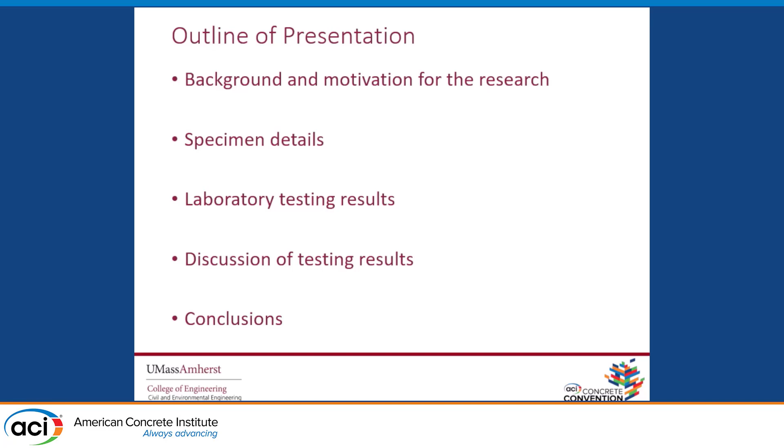In terms of background, the primary objective of the research project was to evaluate the structural integrity provisions that exist in ACI 318-19 for cast-in-place perimeter beams. The primary objective was to evaluate the placement of bottom bar splices that provide continuity for these perimeter beams, one of the fundamental aspects of detailing this type of beam. As an effect of some testing observations, we also evaluated transverse reinforcement requirements, particularly spacing, for perimeter beams designed in seismic design categories A or B, the lower seismic design categories in the United States.

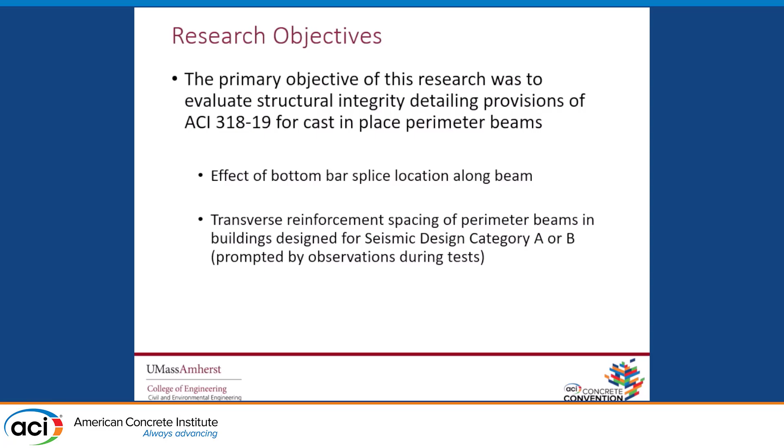This was prompted by observations after the testing; we did not expect this to take place a priori before we started testing. To frame the discussion, let me give a little background on the intent of section 9.7.7 in ACI 318. The idea of that section is to prevent disproportional collapse of large portions of the structure after a small failure, or failure of a small portion of the structure.

I quote ACI 318 R9.7.7: it is the intent of this section of the code to improve redundancy and ductility in structures so that resulting damage may be localized. The idea here is that after the unintended failure of an element due to some form of abnormal loading, this failure will not propagate to the rest of the structure and cause general collapse.

Many of you know what that means. What that implies is that the structure has the ability to redistribute internal forces after local failure, and that this capacity is maintained at large displacements, at large plastic deformation. I'd like you to keep that in mind as we go through the presentation: the ability to redistribute forces and maintain capacity at large displacements.

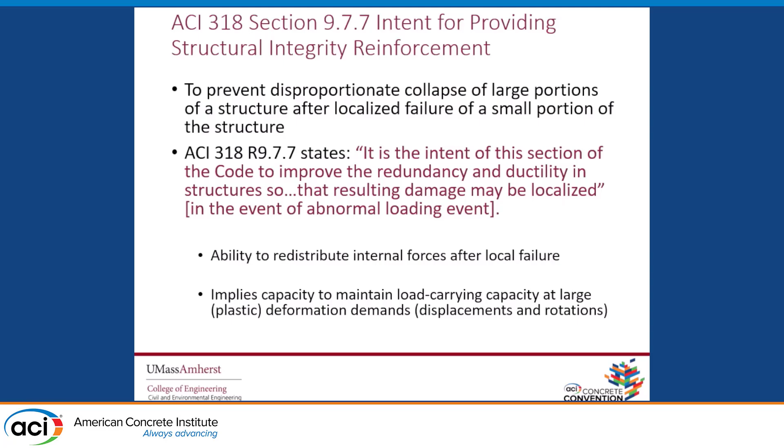Going over some details, this is borrowed from an ACI publication summarizing the typical details for integrity reinforcement in perimeter beams in ACI 318. The key aspect is that one needs to provide continuous top and bottom reinforcement, with a certain fraction extending into the supports. One quarter of the reinforcement provided in the maximum positive region needs to extend into the supports, and one sixth of the negative reinforcement at the support needs to be continuous through the length of the beam. Continuity may be achieved by splicing longitudinal bars with Class B splices, so they don't need to be one piece of reinforcement.

The other aspect of integrity reinforcement is that these longitudinal bars intended for integrity need to be enclosed by either closed stirrups, U stirrups with a cap tie, or hoops throughout the length of the beam. The spacing of these is not indicated in ACI, but it's presumed the spacing would result from other demands on those elements such as shear and torsion.

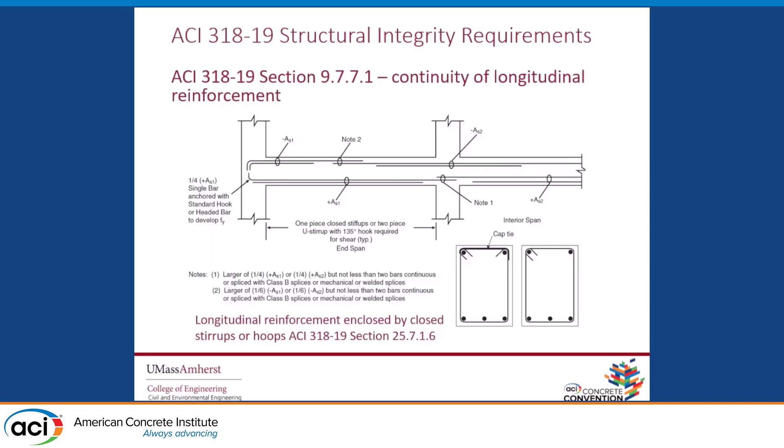With that in mind, we looked back at some testing other researchers have conducted on structures in higher seismic design categories. Our intent was to evaluate how these provisions worked for buildings designed in the lower design categories in this country. So we chose this floor plan, which has been studied by others, essentially from NIST, Liu et al.

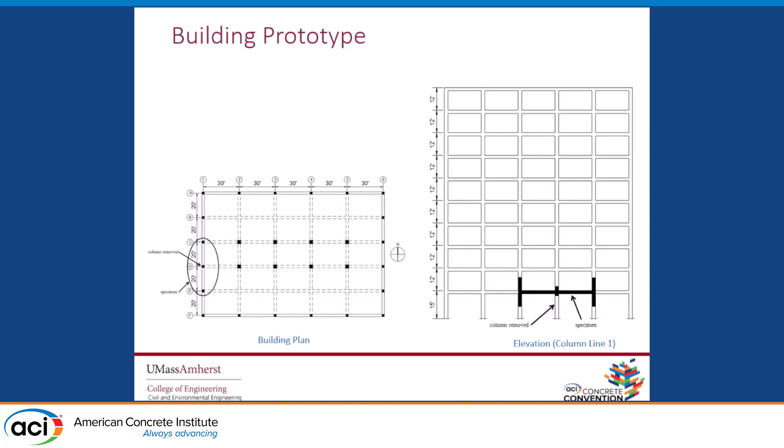The building was a fairly regular rectangular building in which the perimeter frames are the ones we intended to study. We modeled part of that perimeter frame, thinking of the potential loss of an intermediate support, and constructed this H-shaped specimen at full scale in the laboratory to test it to failure. So we were using a building prototype to design our laboratory specimens.

What we were intending to study was the location of this bottom splice in the bottom longitudinal reinforcement, which would provide the catenary action needed to prevent disproportional collapse. Some of these details rely on catenary action to prevent disproportional collapse from occurring.

The details of the columns are not important, but what's really important is where we placed the lap splice and the arrangement of these closed stirrups along the specimens. As you can see, we tested 3 specimens.

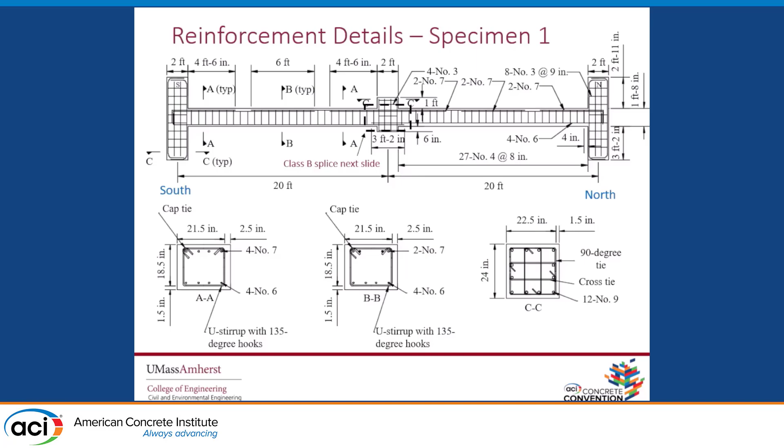As you can see, we tested 3 specimens. The dimensions I should highlight were full scale, so we had 40-foot long specimens. The only thing we changed in these specimens is where these bottom bar splices were located: centered about the center column, and some two distances away from the center.

The idea was to minimize the congestion in the joint region and see if moving the splice out of the column region would affect the response of the specimens.

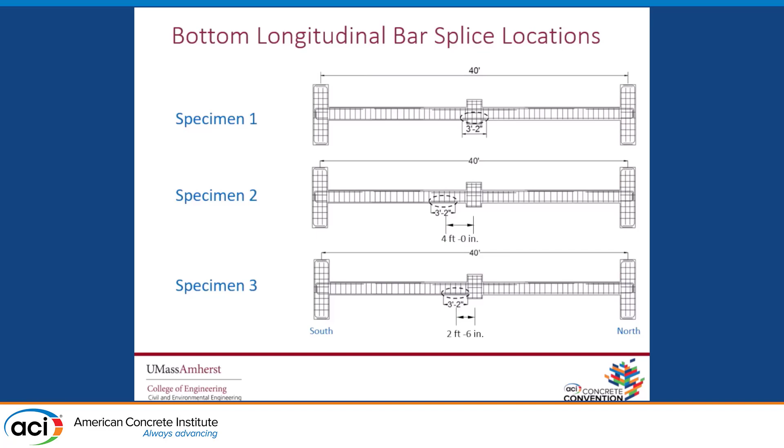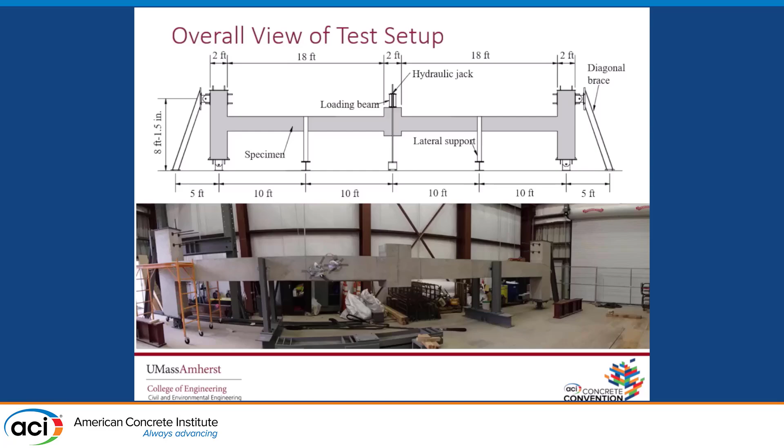We were loading here at increments of load to come up with the maximum load this specimen could take, and try to develop that catenary action we were looking for to prevent disproportionate collapse.

Some of the instrumentation I will be referring to: the specimens were instrumented with displacement transducers along the length of the span. We also had inclinometers located at the ends of the beams to measure rotations and come up with moment rotation relationships. We also had load cells located under the application of the vertical load.

We also wanted to measure how much restraint was being provided at the top and bottom of the column, so we placed some load cells also at the ends.

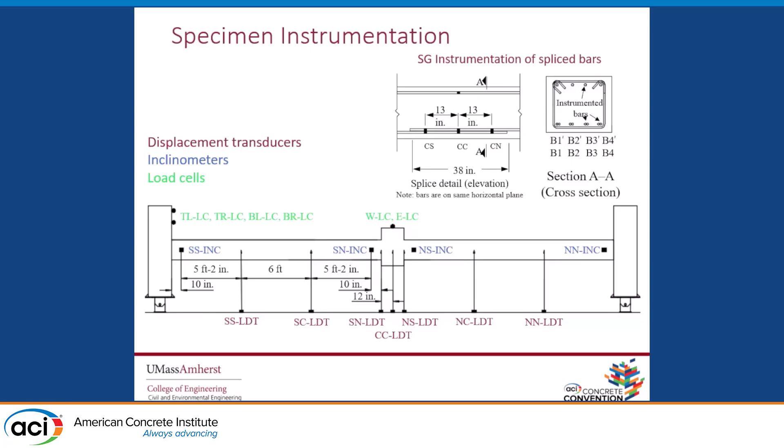One item I will not discuss in this presentation is that we also instrumented longitudinal bars with strain gauges at the location shown here, to address whether the location of the lap splice was going to be influential in the specimen response.

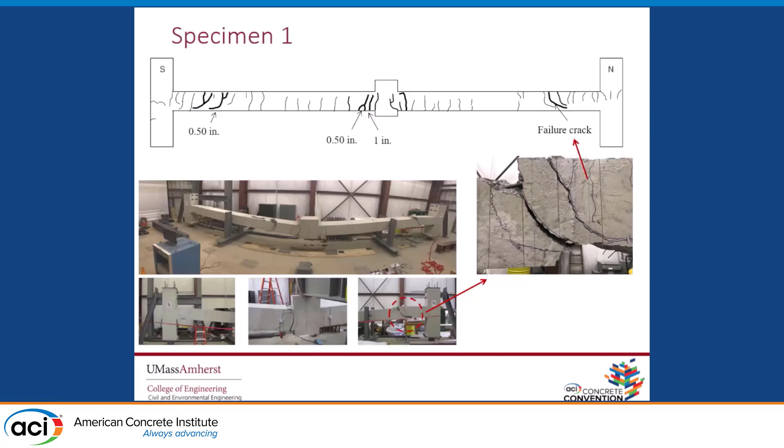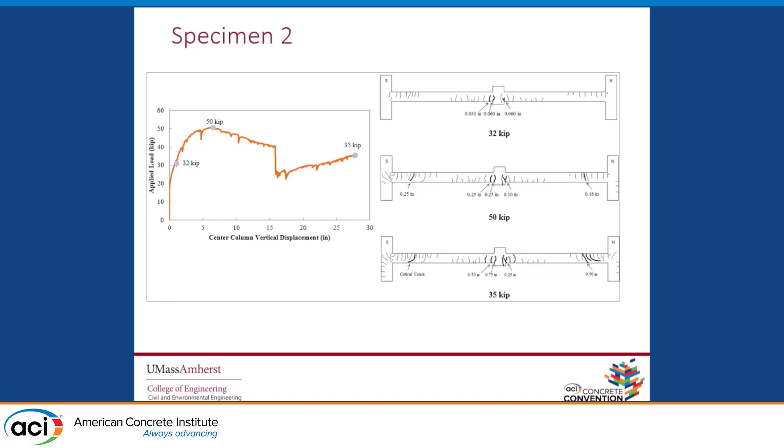Specimen 2 had a similar behavior, loading to peak and then sudden unloading. In this specimen, we kept loading to try to develop, as I will call later, catenary behavior of the specimens. You see similar crack patterns as for specimen 1.

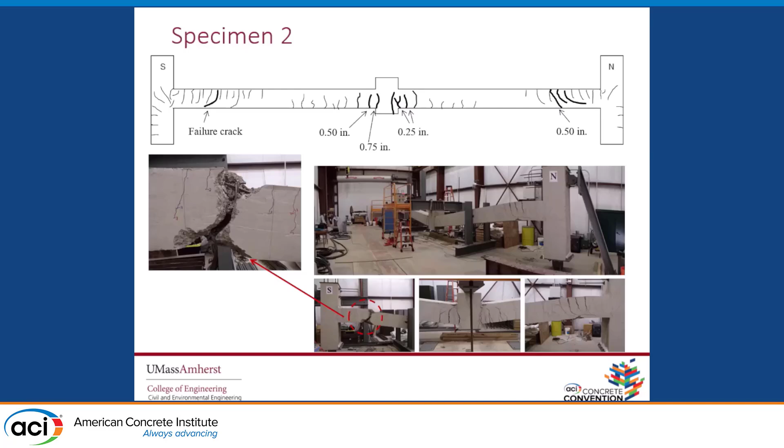You can see an overall view of how much deflection was imposed on the specimen. The critical crack in this case formed in the south face, and this gives you an idea of the width of that critical crack. In this case in particular, we were fracturing stirrups as well.

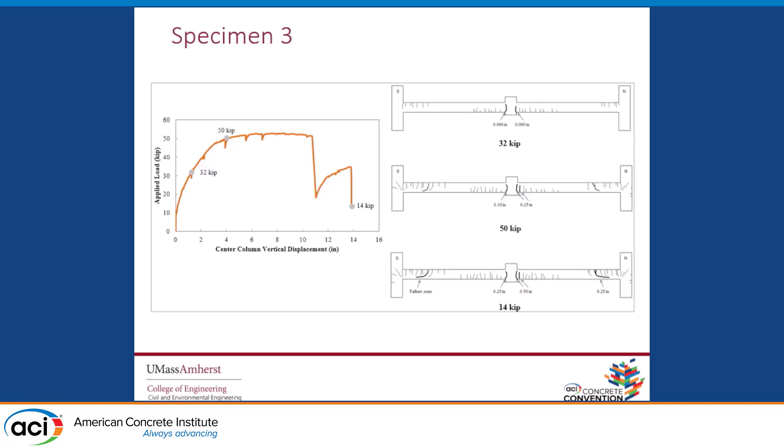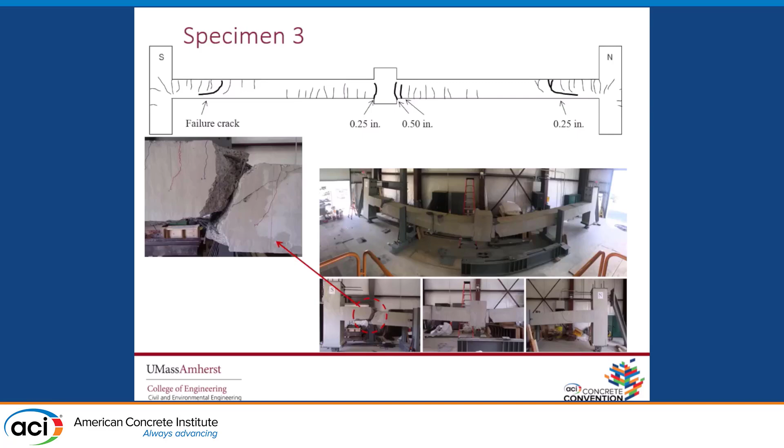Notice this big crack. This is not after moving the specimen, this is right after testing. It's a huge crack that forms, that starts diagonally and then suddenly widens as the stirrups fracture.

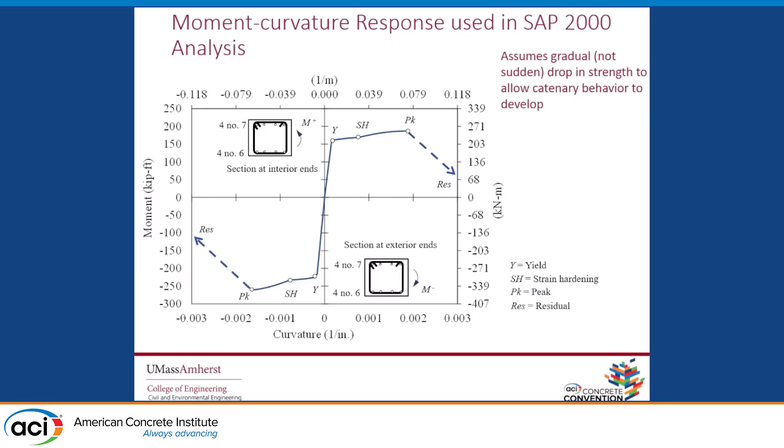So this model does not include any fracture or loss of shear transfer, in order for us to be able to get, going back to this plot, this curve that increases with increased deformation.

Going to what other people had tested, I mentioned the study by Lew et al. Their specimen looked very similar to the one we tested. The key difference was that these specimens were detailed for intermediate moment or special moment frames, so these would be for seismic design categories C through F.

The key difference is the amount of longitudinal reinforcement at the ends, but also the spacing of transverse reinforcement at the ends of the beams. As you can see from the plots, they measured load deflection responses that were very different from the ones we saw in our testing.

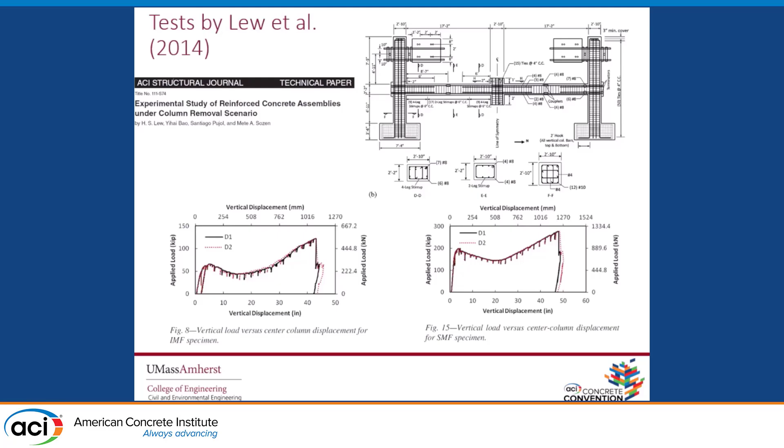In their tests, they were able to develop peak force, then some unloading as the force transfer changes from beam behavior to catenary behavior, and then catenary behavior at larger displacement. They found the same type of behavior for the two specimens tested in this program.

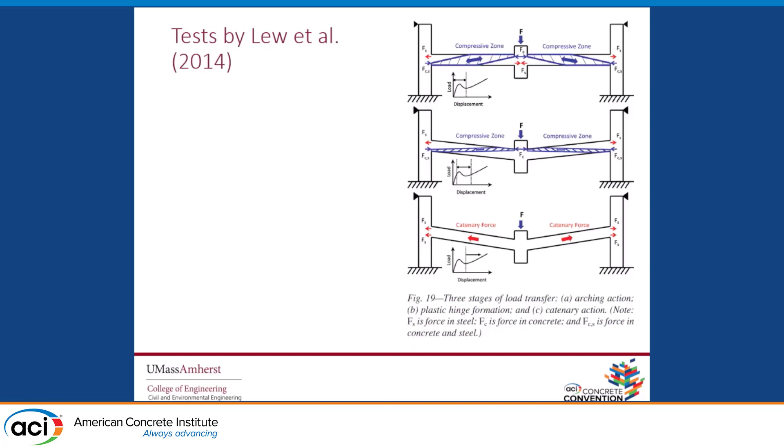The load transfer characteristics were categorized in three stages. What some other people have called beam behavior, they said is more the first stage of loading, beyond peak and first unloading. There's an arch that forms between the application of force and the supporting columns. As you keep increasing deformation, this compressive zone narrows until you're able to develop catenary force that allows the specimens to pick up force by catenary action, by cable action.

Other people have studied this problem as well, and they have proposed simplified models to try to capture the response of specimens like this. In tests by Jian and Zheng, they also identified a beam stage, a transient stage, and a catenary stage, and they tried to define each of these stages through a series of multiple lines, depending on displacement.

They proposed a series of equations to capture the response, and then they superposed their model to try to replicate the response measured by Lew et al. What's interesting is that these curves lie right on top of, or very close to, the curves from the measured test from Lew et al.

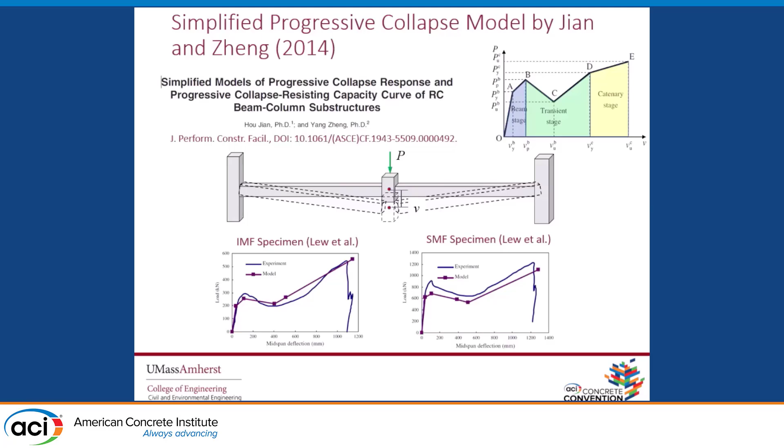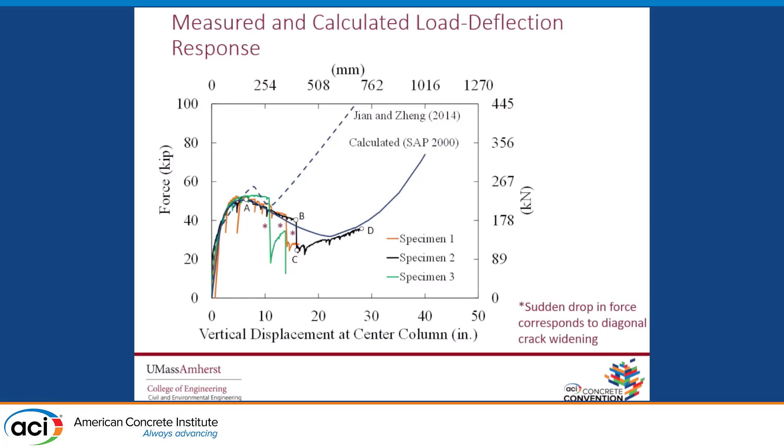But this is the model that we also used, shown as dashed in the load deflection response I showed earlier, right here. You can see their model was not able to predict the response of the specimens we tested in this program. Our specimens were deflecting much more, and more importantly, we're not able to pick up the force associated with catenary behavior.

So this is where what I mentioned earlier comes in — the characteristic of our specimens was quite different from those tested previously, primarily in that there was a sudden crack widening at some level of displacement, and more importantly, as the crack widened, eventually there were stirrups that fractured. So we thought about what was the cause of first this sudden drop in shear force, and that would then translate or lead into fracture of stirrups.

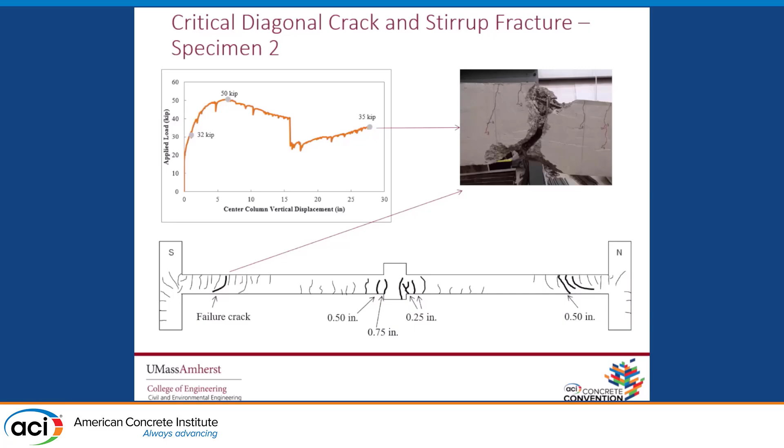We wanted to investigate what generated this sudden loss in shear force. For that, we had to incorporate the two. We evaluated using the ACI equations for shear strength, where nominal strength is given as a summation of the concrete and shear stirrup contribution to shear strength.

We looked at the two code equations from ACI, but we also looked at models proposed in the past that incorporate the effect of plastic rotation in reduction of this VC term. So two models that we studied — the important aspect here is this gamma term, indicating that the concrete contribution to shear strength decreases with increased rotational demand. Using these two models, we were trying to understand why our specimens failed the way they did.

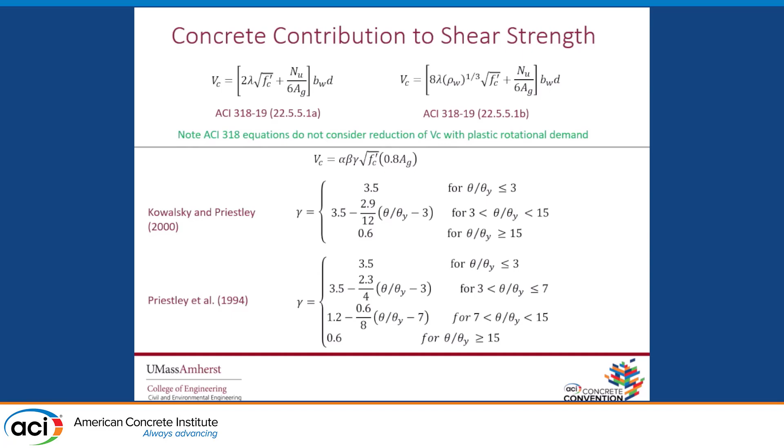Our specimens were able to reach that shear force associated with plastic hinging, but at some point, at increased rotational demands, we saw a drop in shear force. That could be explained using those models that incorporate reduction in shear strength with rotational demand. We were able to identify a range of rotational demand values for which we would expect the V sub C term to drop suddenly, which might explain the behavior of our specimens.

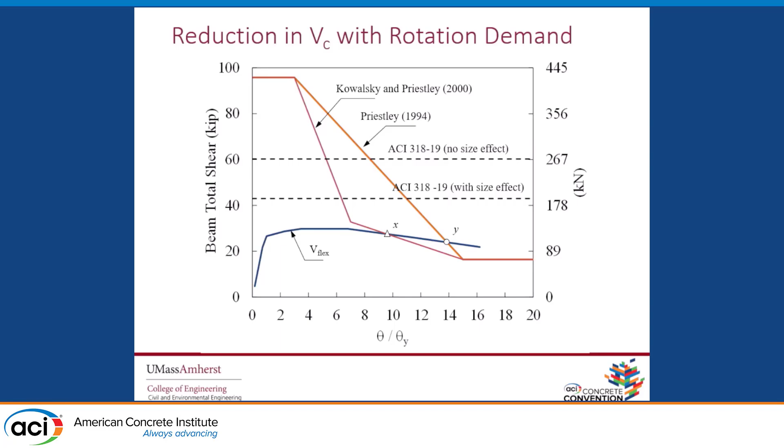This leads to explaining why we had this sudden drop in shear strength at higher rotational demands. Now, this doesn't happen in specimens or elements detailed according to high seismic design categories because of the closer spacing of stirrups that prevent widening of those diagonal cracks.

So in conclusion, I didn't mention anything about longitudinal bar splice location because there was no influence in the behavior of those specimens from the three locations for that bottom longitudinal splice location.

But we did find that catenary behavior, which leads to prevention of disproportionate collapse, did not develop because the specimens did not have the capacity to carry loads beyond formation of these critical diagonal cracks, and therefore the specimens failed prematurely in shear prior to being able to develop that catenary action.

We recommended, or found, that models which include reduction in shear strength, V sub C, as a function of rotational demand can be used to explain this type of behavior.

The steep diagonal crack that formed after loss of VC really decreased the available shear strength, which then led to eventual fracture of transverse reinforcement in some cases.

So these are the main findings of this study. I think what follows is that we need to provide attention to how we detail these beams so that they don't suffer from these sudden losses in concrete contribution to shear strength as a function of rotational demand.

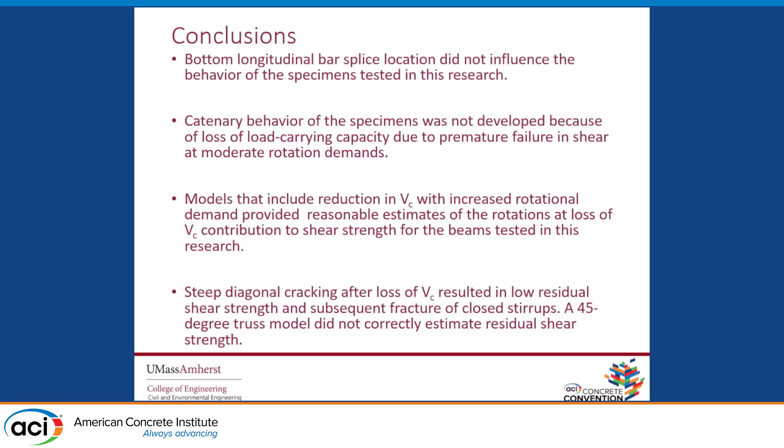I don't know how you want to moderate questions. Okay.

We have a couple minutes for questions if anybody would like to step up to the mic here, kind of difficultly placed behind the column. Yeah, yeah. I might have missed it.

So when you showed the special moment frame specimens, I saw a fixity in the columns in terms of foundation. Was that replicated in your specimen? I don't know if I saw it correctly. That's a good point—our specimens had pinned boundary conditions at the base.

Pinned, yeah. So what we were trying to model, if you remember the frame, was approximately mid-story height to mid-story height, where there's very little moment. I don't know what the motivation was for fixing the bases in those other columns that Liu et al. tested. Oh, thank you.

So how about the top of the columns? How did you fix the top of the column? We also had pins, and we had steel braces going backwards. So the top of the columns were also permitted to rotate, but they were restrained laterally in plane.

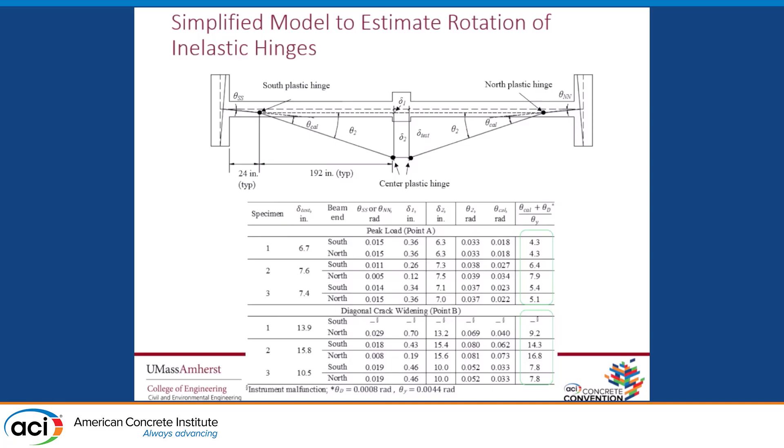I mean, we would be definitely interested in doing that. Hopefully, at some point, we will be able to do so.